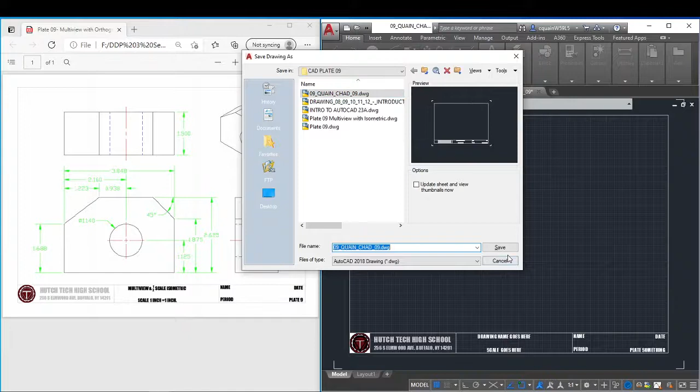Now we're going to start with the isometric, like I said. So I'm going to come down here to my snap mode, not click on the grid, but click the next of it, change it to isometric, come over here. So now I'm in my isometric mode. And don't forget F5 is what changes our orientation.

So I'm going to start just by creating a simple box, starting kind of low. Notice I'm at a flexible angle here. I want to go F8, which locks me into my 30s and my 60s. I'm going to go 3.48.

3.848. My overall height is 2.625. I'm going to come back at, let's see here, 3.848. And I'm going to show you another little command, it's called close, which is C and enter. Takes us right back to our starting point.

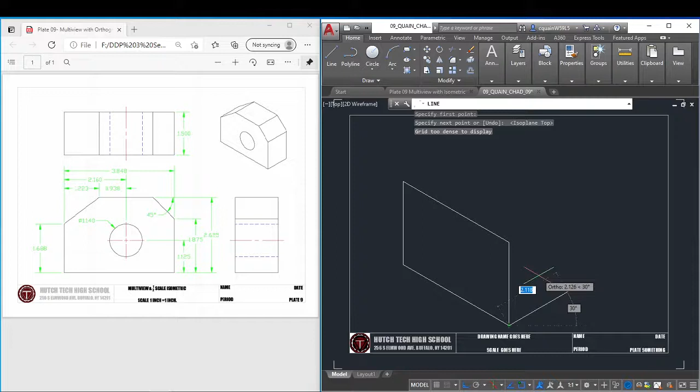Come back into our line command again, right here, F5. Now our depth is going to be 1.5, enter. F5, and it's going to be a distance of 2.625, enter, and then again I'm going to use the close. Notice what happens when I did close that time - I didn't want that, I want it to be up here, so I can just grab the endpoint and move it there.

So you have to be careful where you use close. If we started at this point and I hit close, then it would bring it to there, but since I started here, notice what it had done, it brought it down to here. So you can always manipulate it and fix it.

So I'm going to come over here and I'm just going to use the copy command. Select the object, grab its endpoint and just move it over. And then I'm going to repeat the copy command again, selecting this object and just replacing it over here.

Now, next thing I'm going to do is I'm going to go ahead and locate where this center point of this circle is going to be. And we cannot use the offset command - I'm going to tell you that right off the bat, which is kind of a big bummer. But I'm going to just go ahead and pick a line right here at the center here, and I'm going to draw a distance going upwards of 1.125.

Now, the reason why I can't use offset is because offset does not work in an isometric style. Watch this: if I go in offset here, I type in my distance, 1.125, take my object, and offset up - do you notice that it's the wrong distance? Okay, so you cannot use offset.

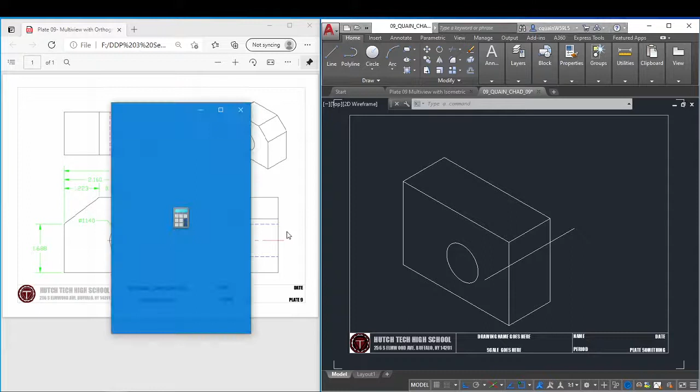Now, next thing I'm going to do is calculate what the distance of 2.625 minus 1.875 is. I'm going to bring up my calculator and type in the following: 2.625 minus 1.875 equals 0.75.

So I now know that I have to go from here to here is 0.75. Now, a 45-degree angle means that from here to here is going to be 0.75, and from here to the next line is also going to be 0.75. That's just our good old math that's going to come back and help us here.

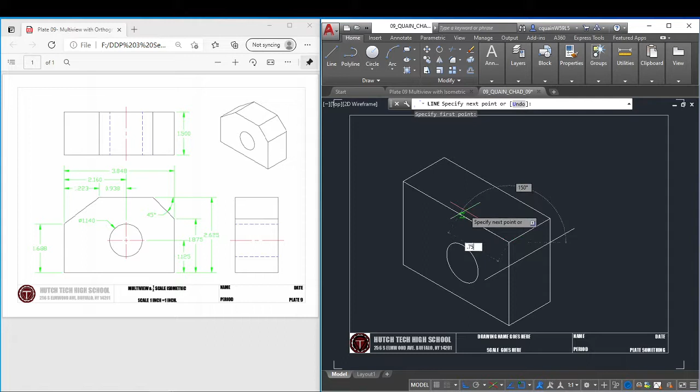So 0.75, let's draw that line nice and long. Okay, that's an oopsie. And then what I'm going to do is just come in here and connect endpoints.

So now this would not work if it was a different angle. If it was a different angle, we'd have to go about it a little bit different of a way.

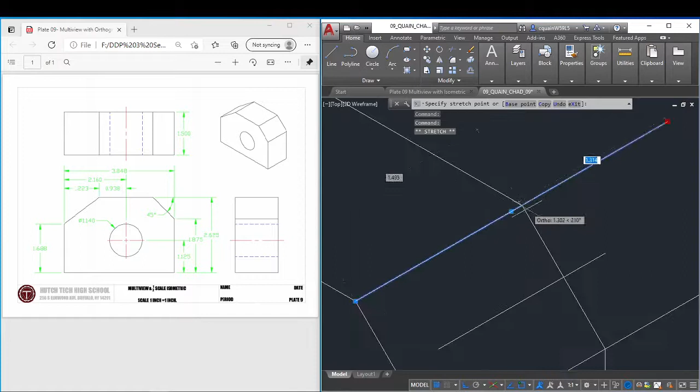Delete that line off, delete that line off. Slide that point back. And then I can do the same thing here, slide this point right to there. I could also use the trim command. Simple as that - I can delete this piece off right here.

So now let's take a look at creating this back here, this chunk. Now this here is an angle, but it's not given to us in an angle - it's given to us in a numerical value. So let's go ahead and figure that out.

From here, F5, I need to go up 1.688, enter, and then I'm going to simply draw a line going backwards, just like that. I no longer need this line here, so we're going to delete that.

Now I have to figure out what the distance from this corner to this line is. Let's zoom in here - looks like it's 0.223. Let's just verify that. It is - you can barely see that one. For whatever reason, sometimes AutoCAD does that.

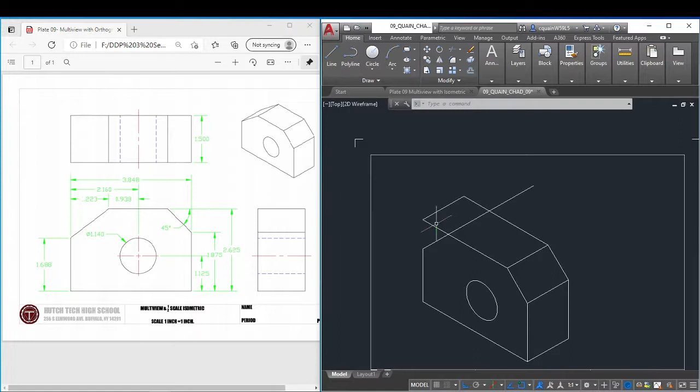Or not AutoCAD, but the PDFs do that - you lose a little bit of clarity in them. So I'm going to come in here, line, F5, change my orientation, 0.223. And then I'm going to simply draw a line connecting down to there.

Now, next thing that we're going to do is some trimming here. And I'm not going to do a trim command, I'm going to simply do a delete. Grab that piece here and slide it back to the intersecting point right there.

Now I'm going to take and do this a little different. I'm going to delete this line here, and you're going to say, Mr. Q, why are you deleting that line? I'm going to show you why - because I'm going to copy these. I don't want to do any more math, my brain already hurts. I'm going to copy this here and simply move back here. Notice that I kept that line so that I knew that everything would line up.

So let's go ahead and do a trim, right click, and let's get rid of that piece there. Now it still doesn't look quite right, because we're missing a line right here. So let's do an F5.

Copy this line here. Let's go from here and place it right there. Simple as that. There is our isometric drawing.

Now you're going to say, well, Mr. Q, we got a problem here. This object is supposed to be half scale, and we've drawn it at full scale. Well, I'm going to show you a cool little trick. So watch this. We're going to come back in here, snap mode, back to rectangular.

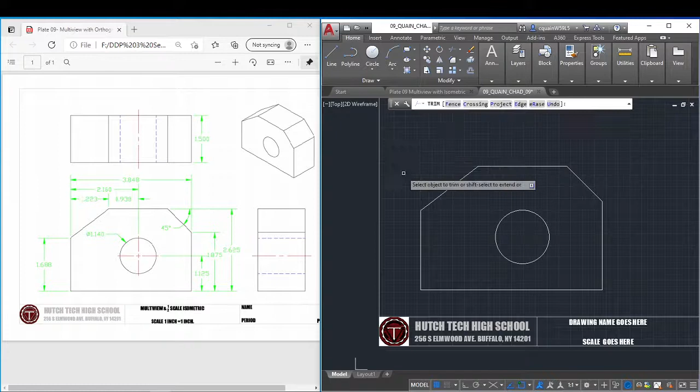So now I can go ahead and create these lines from here to here. Okay, green box, select those, delete them. Trim, right click, get rid of those. Okay, so there's my front view of my object.

So next thing that we're going to do is project some lines across so that we can get our right side view and our top view. So I'm going to simply draw a line from here, F8, straight across. I'm going to draw it nice and long, don't care if it goes outside my box.

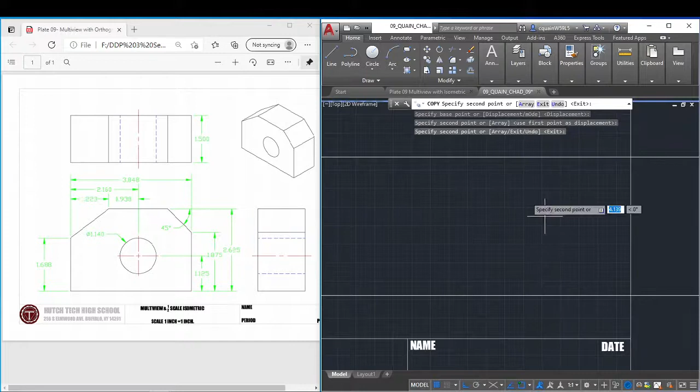And I'm going to use the copy command. Copy, right click. Anywhere that there is an intersecting point, here, here, here, those are corners. Corners are represented in our right side view. There's also a couple other spots that are represented: topmost point, bottommost point, and middle of a circle.

And also we have a line over here that is represented. But thing is, it appears that that is right on top of this circle here. And let's take a look at it and make sure that it is or it is not. Okay, it's pretty darn close, but we'll just have to make sure that we change that.

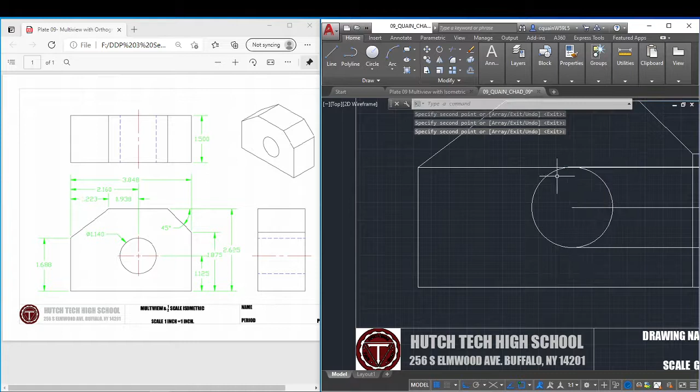So first things first, let's go ahead and look at getting a couple more lines in here.

Let's see, our first line is going to be over here, just projecting down. I just picked a random spot, it does not matter.

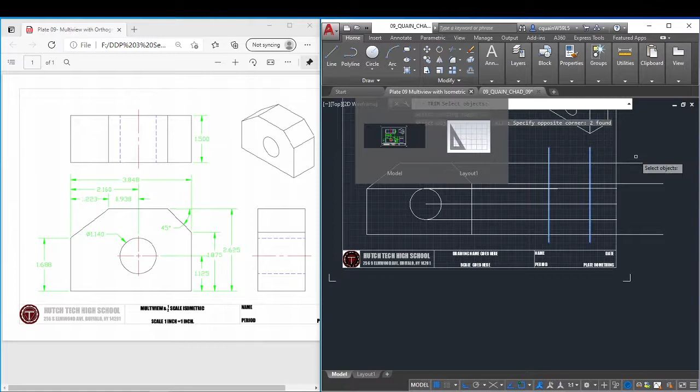I'm going to offset that the distance of 1.5 because that's how thick our object is. I'm just going to use the trim command, pick those as our boundaries, right click, and go ahead and delete those.

So the next thing I'm going to do is come in here, use the trim command again, right click, trim those, and trim those. So now we've got a nice clean slate to work off of.

What I want to do is come up here to my layers, and we're going to go into layer controls. You're going to notice that I've created some layers for us. So I'm going to click on the red layer here.

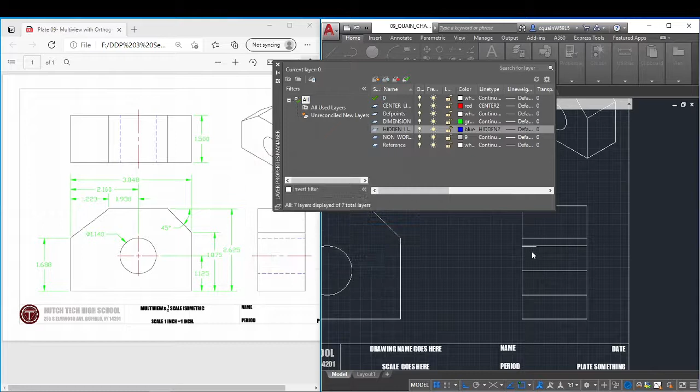And I'm going to load it as a 0.5. And I'm going to click on my hidden, and I'm going to load that as a 0.5 also. So let's go back over to our layers.

Let's change this over to our center layer. And we're looking for the line that's right here. So let's select that line here. Change that over to center.

And then we're going to take this line right here, this little line right here, and I'm going to fix that little line, and then this line right here. And I'm going to put those as hidden lines.

Now, I forgot to deselect my middle one, so let's go back here, just change that back over, no big deal, just like that.

Now that little line that I was talking about before, we got to make sure that we stretch that out. So I'm just going to go up here to trim, hit extend, right click, enter, right click, and select this item.

Why is it not working? Alright, it's giving me a hard time. Try this again. Extend, right click, zoom in, and it's not liking that line. I don't know why, it's not happy with it.

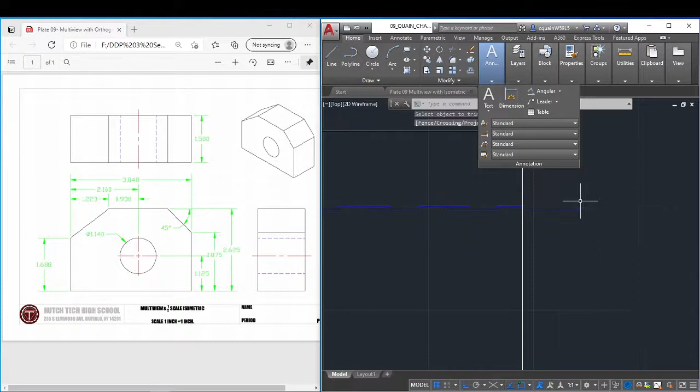So let's just take and grab it, and let's just extend it over. We're going to go extreme. Come back here, trim, right click, enter, trim, right click, and select that piece.

Okay, so now you should have two lines that are stacked very close to each other. So now that is pretty good. We have to fix our center line here so that it extends past, just like we see in our PDF.

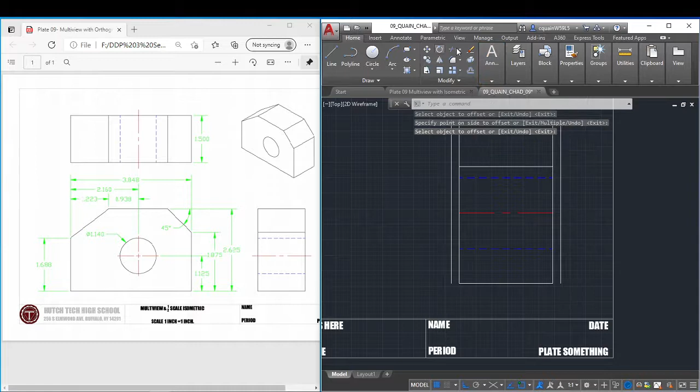So let's go ahead and use the offset command of 0.125. And then let's use our extend again. Right click. Now our extend's working. Weird.

Not sure why it didn't like that line, but it is what it is. So now there is our right side view.

Next thing that we're going to do is we're going to project straight up. Obviously we don't want to project it up in our center layers, but we can change that. So let's go ahead and change that over to a 0 layer.

Try that again, change that over to our 0 layer. Change it over to our 0 layer. There we go, alright. Sometimes AutoCAD likes to fight us.

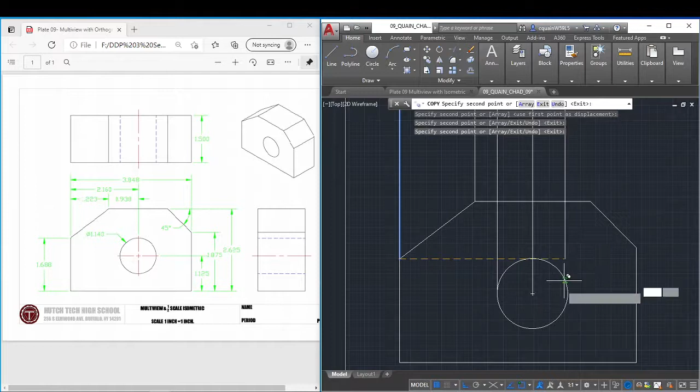So now we're going to go ahead and copy. Again, take that endpoint, and we're just going to simply use information that we already have. Simple as that. So now we have all of our objects.

Let's just go ahead and do this color coordinating a little bit different this time. While it's fresh in our minds, we know that those are hidden lines right there. Hit escape, select this one here. We know that this is a center line right there, so that's good.

So now let's go ahead and draw one line straight across. Boom, boom, boom, just like that. And let's use our offset of 1.5. Not 10.5, 1.5.

Select this, bring it downward, just like that. Enter. And let's do our trim, right click, select those pieces there, and it never created that other part.

So let's do a Control Z here. Let's do our offset 1.5. 1.5. Did this to me before.

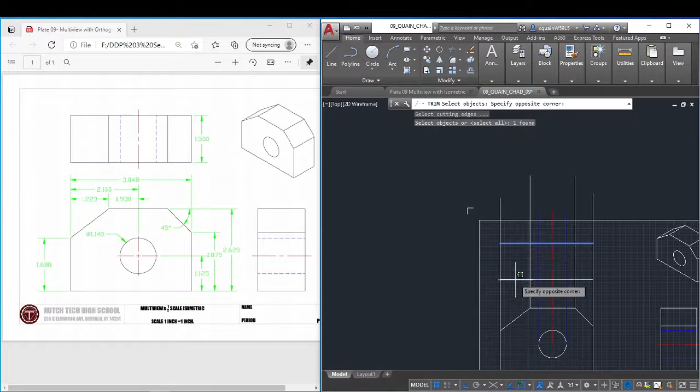Alright, now let's do our trim, let's do it the right way this time. Pick that and that as our boundaries. Right click. Now I can select that, and now I can select that.

There we go, so next thing we're going to do is we are going to take an offset again, 0.125 or 1/8. Offset up, offset down, right click, cancel.

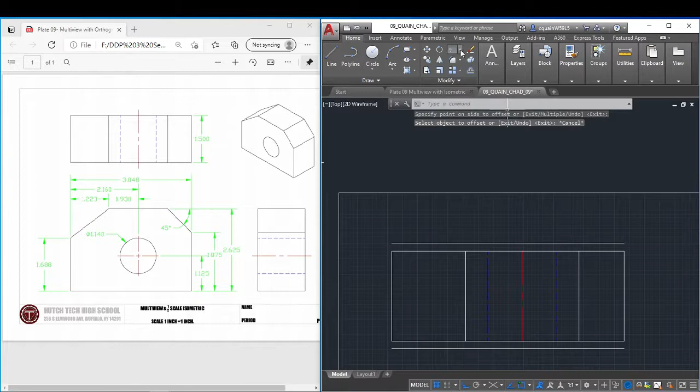Use the extend command, right click. Select those lines there, delete them. I'm going to do a save, just to be on the safe side.

All right, next thing we're going to do is dimension this. Let's go under our layers and see if we have a dimension line. We do, so that's great. Now we can go under annotate, and let's go under linear.

Let's zoom in here, and we're going to go ahead and place a dimension right over here. Zoom out, hit spacebar, and let's go ahead and put a dimension from here to here.

Remember, larger dimensions always go to the outside, and then smaller dimensions go inside. Spacebar again. And this time, actually, I don't want to use spacebar. Let's go ahead and use continue.

Pick my object, and then I want to go over to the center of this circle. Alright, there's that. None. And do I need any other ones? Escape.

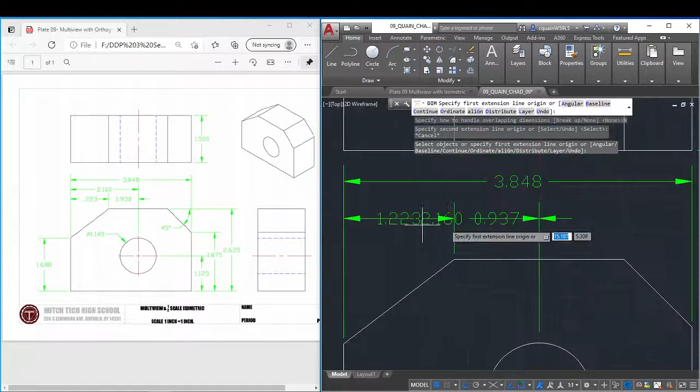Hit escape. Now let's go ahead and do a little cleanup here again. Select the correct line, bring it down, select the correct line, and see that one's going up, so let's take this one here, bring it down, so it's in the same plane as that one there.

But did you notice what it did? Let me go back here, do a Control Z. Alright, kind of made a mess of these dimensions, but that's okay, we can fix that. Even though it extended, do you notice how it put this other arrow here? We're going to go ahead and get rid of that arrow. So let's go ahead and go under properties.

Once we're in properties, I want to make sure we go under the arrowhead. Let's see here, we want to go extension line or dimension line. We want dimension line. I'm going to slide this over to the side here. I want dimension line off. There we go, good guess.

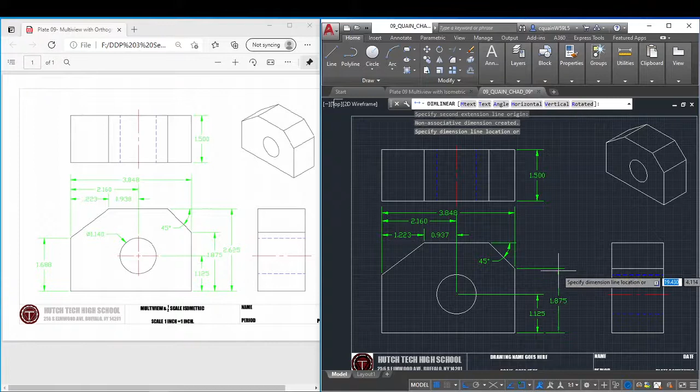I'm just going to simply stack another dimension here, a little different this time, and I'm going to show you a trick I'm going to do in a minute. So now I'm going to go under dimension here again, and pick another point right here, and go all the way to the top of the object, just like this.

Now we're going to do a little cleanup here on our dimensions, because all these dimensions should have the exact same extension line. So I'm going to come in here to this dimension and this dimension, and try to see if I can turn off both of their extension lines at the same time. Let's see what we can do. Bingo, I was able to turn them both off. So now I can grab this here, bring it all the way back to here, hit escape twice. Now they all share the same one.

I'll do the same thing with this. Up here, find the extension lines, and I'm going to try turning extension line 1 off, which didn't seem to do anything. So let's try turning extension line 2 off. That worked this time. Grab this point here, bring it back to there, hit escape. And there we go, that's just something nicely cleaned up.

So I'm just going to bring this over a little bit, and do something called stacking my dimensions. I don't know what that just did, it's definitely not stacking my dimensions. All I'm trying to do—nesting is another word they'll use—is just get my dimensions a little bit tighter so they don't interfere as much with the drawing.

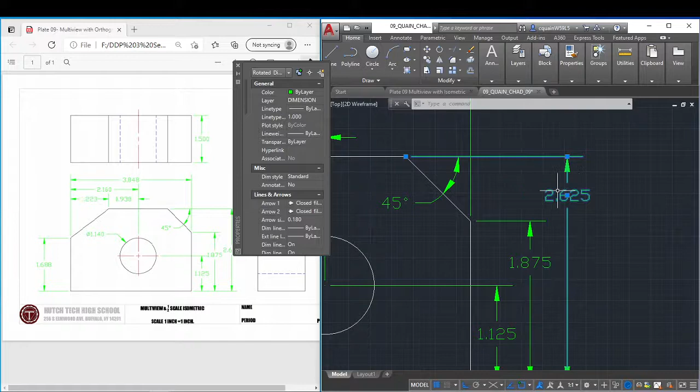So there we go. Let's take a look at everything here. These all look nice. I got that dimension there, I've got this here, here, here, here, I've got that dimension there. So the only other one I'm missing is going to be this one here and the diameter. Let's go ahead and put those in.

Linear from here to here. Beautiful, and let's do one more. Diameter, that circle right there, like that.

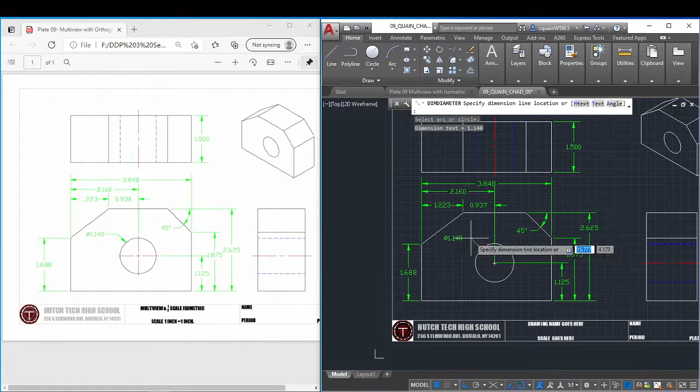Last thing we're going to do is type in center mark, select our circle and place it. Now we're going to select it again and change the layer, because we should have changed the layer beforehand, but now we got that. See how we got these green lines sitting on top of the red lines? We don't want that, so we're going to grab this center point here, bring it up to there just like that. Select this one here, and bring that back to there.

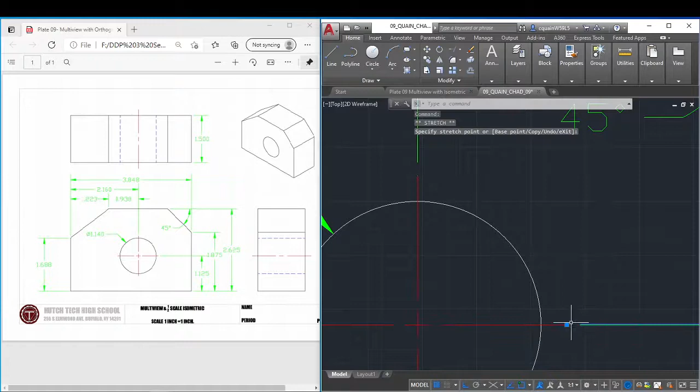Alright, so there's our drawing. Now, last thing we're going to do is go in here and change our title block to all capitals, Multiview.

Let's try that again, all caps: Multiview, Shift 7, one half, space, scale, isometric, enter, scale, 1 inch equals 1 inch, name.

Don't forget to come under here, paragraph, and do your left justify if you need it. Hit enter. Period for me is, again, 9. Go ahead, put your plate, and this is 09. Make sure you get that space in there. Perfect, just like that. Do a Control S for save.